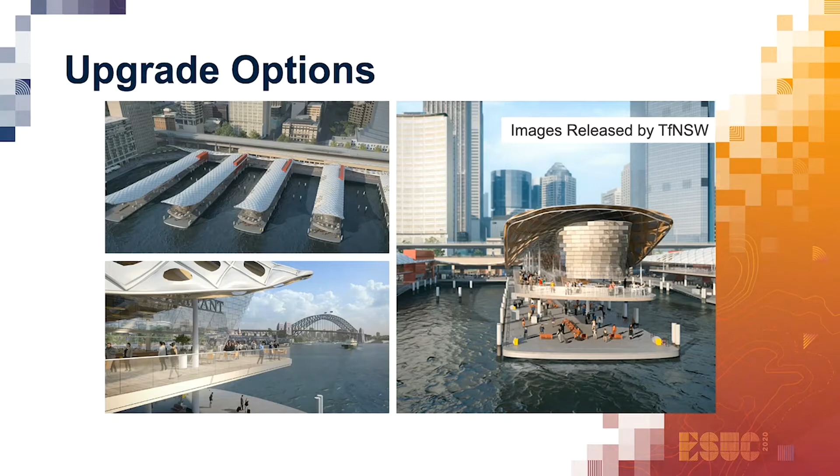So the upgrade options: New South Wales Government is considering a number of options ranging from upgrade of the ferry wharves to complete revitalisation of the precinct. This is driven by ageing infrastructure - the ferry wharves were built around 70 years ago, and the ferry wharves and promenade do not have the capacity to meet future expected growth.

So our project scope, as I mentioned, the Circular Quay renewal investigation - the project team was engaged by Transport to carry out the investigations, capture what is currently in place, and inform all stakeholders of the current assets and the conditions of those assets.

The project team comprised Coffey, one of our Tetra Tech partners—Norman Disney and Young are part of the overall Tetra Tech group globally, and Coffey are our sister company within that group. They provide technical, geophysical, asset condition, hazardous materials and contamination investigations. There were also project surveyors engaged to carry out the 3D laser scan, services detection, Revit modeling from the scan data, and asset site survey. Then NDY ourselves, a BIM and data services team, functioned as the core behind the BIM management, data management, the BIM and GIS integration, and the final product—the overall asset information model comprising all of that data.

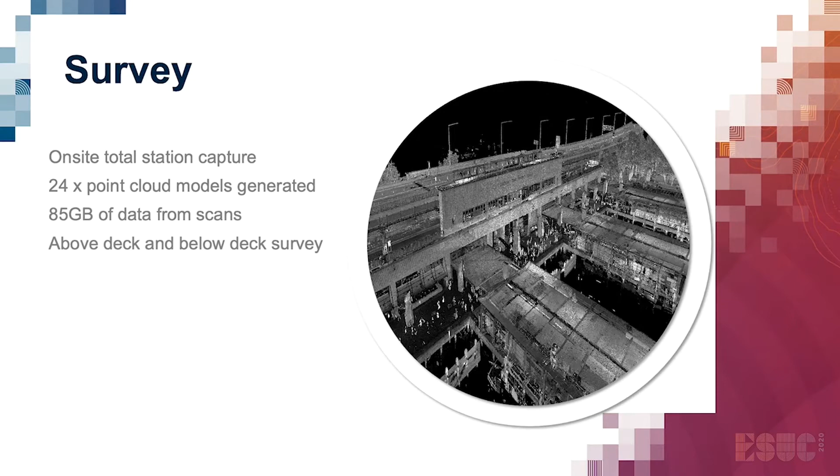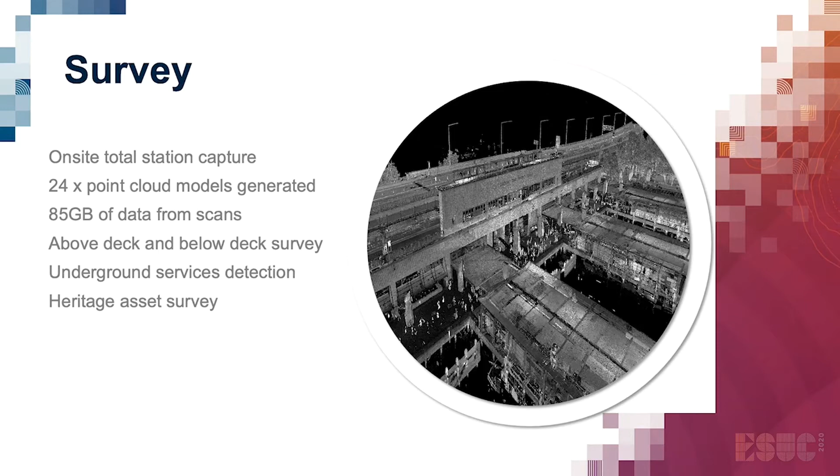From a survey perspective, we've got the on-site total station capture, 24 point cloud models generated, 85 gigabytes of data from those scans, scanning above and below deck on the wharves and promenades, underground services detection, and heritage asset data survey. There's a number of heritage listed elements around the quay which we needed to record as well, providing an overall detailed Revit model and 3D cadastral model for asset ownership management.

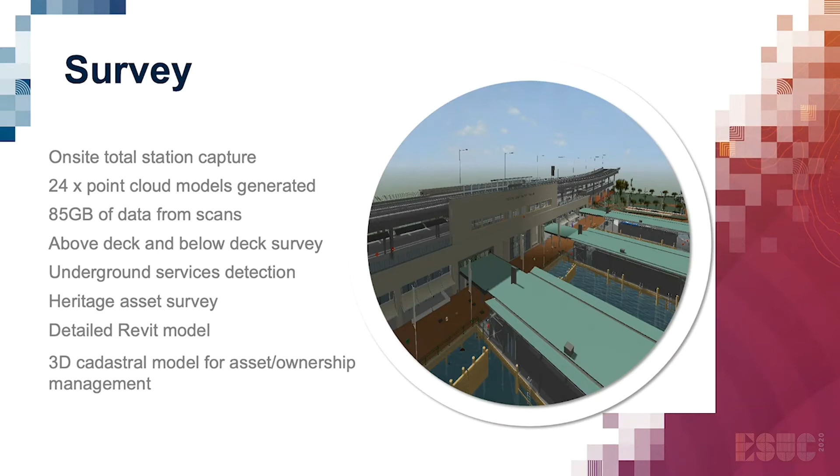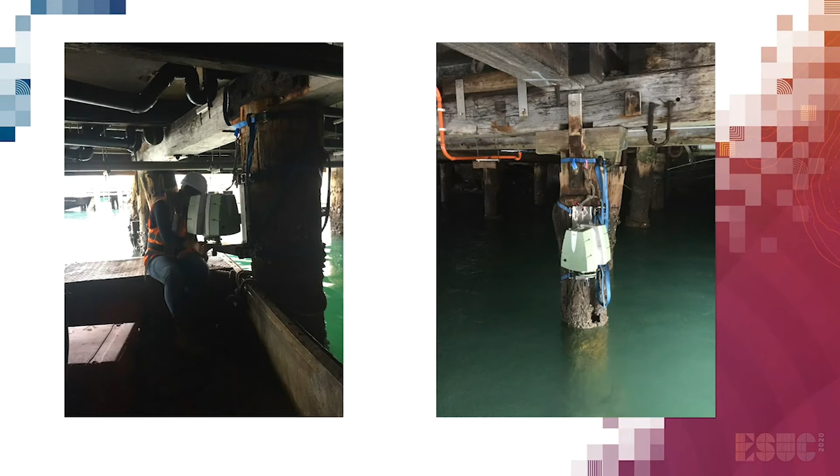Attaching the scanning equipment to piles underneath the wharves and promenades—again restricted with access, not only with it being a busy waterway, but also restrictions on the tides as well.

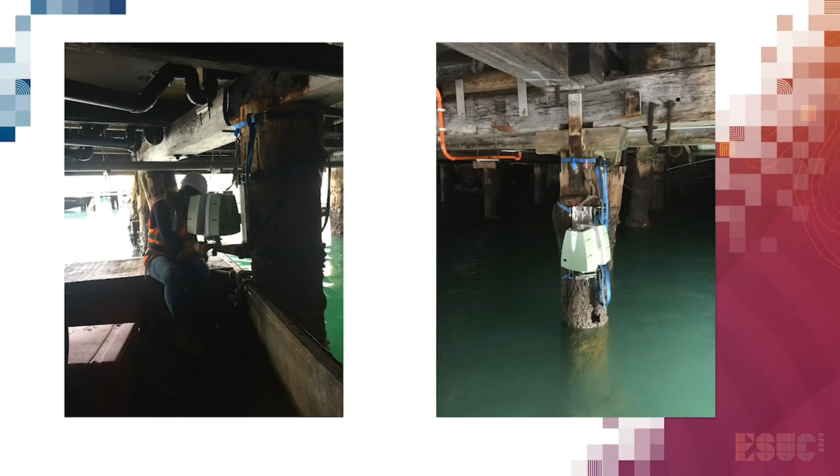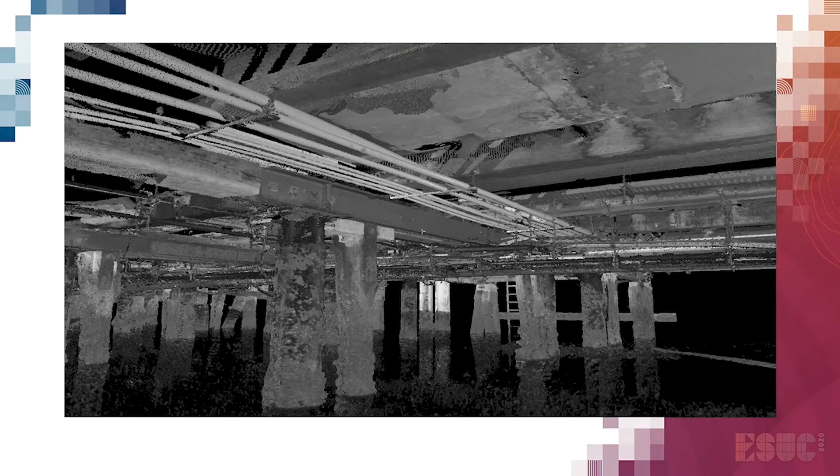One of the colour scans that was taken was from the Museum of Contemporary Art, which was also modelled.

So then getting on to the BIM, GIS and data management part. Ultimately, our deliverables were to provide 2D and 3D detailed site information, incorporate the 3D geotechnical ground model, 3D point cloud survey data and the resultant 3D Revit model, incorporating topographical survey data, existing services and utilities, and the production of that overall BIM for all of that data, and ultimately delivering that into an asset information model within ArcGIS.

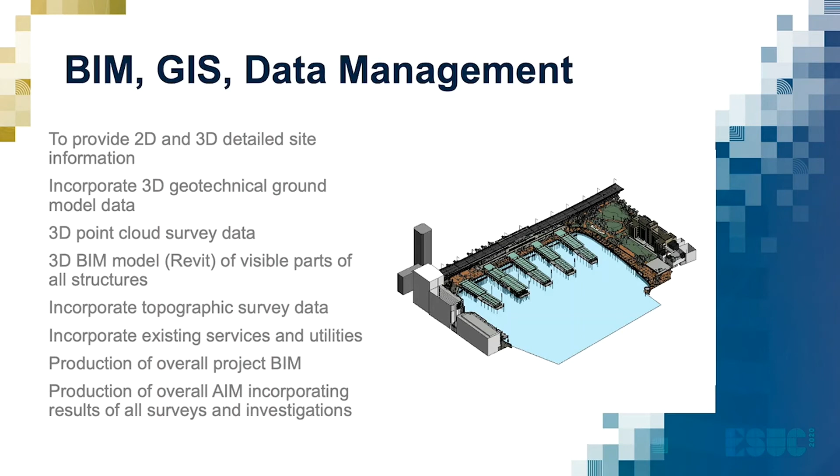At the same time, we were capturing contamination information, asset conditions, structural surveys, services, including all of the services below the wharves and promenade, and hazardous material reporting. All BIM models were delivered in their native format and in IFC, and all data structured in accordance with BS 1192.

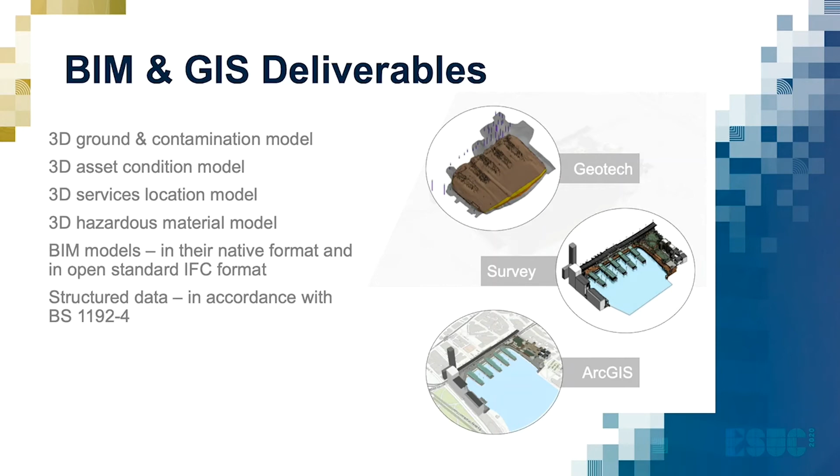So the project delivery platforms, our primary delivery platform is Autodesk Revit and Navisworks. We also utilise Revizto for project team collaboration and site survey, and Esri ArcGIS for the asset information model.

It's a high-level process diagram that was generally the way we produced and managed the data captured from the BIM authoring software, which is in Revit and IFC format, managed in Navisworks and Revizto to deliver on-site model access. Geotechnical engineering software, Rockworks and CAD outputs, again feeding into our Revit model and the creation of those Revit models.

Through ArcGIS interoperability extension, ArcGIS Pro, and then ultimately building our asset information model within ArcGIS, compilation of the GIS layers, and ultimately delivering that web scene.

For the stage 1 project, delivery was via ArcGIS Online. We wanted a very simple interface, and it was also used to demonstrate what we could do. Whilst the Esri ArcGIS Online application wasn't part of the delivery, we really wanted to demonstrate what we could do and how we could offer up that 3D model, overall asset information model, to all stakeholders on the project.

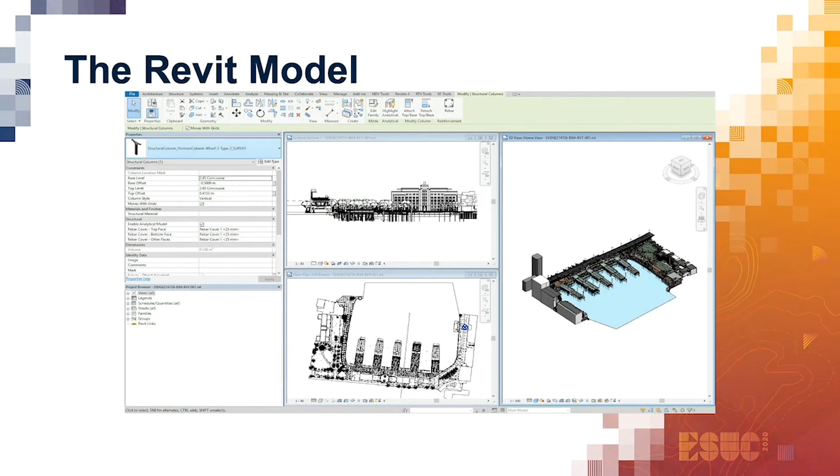So here's a few shots of the details on producing those models, ultimately ending up with an overall Revit model with all of the architectural data and structural data captured from the laser scan.

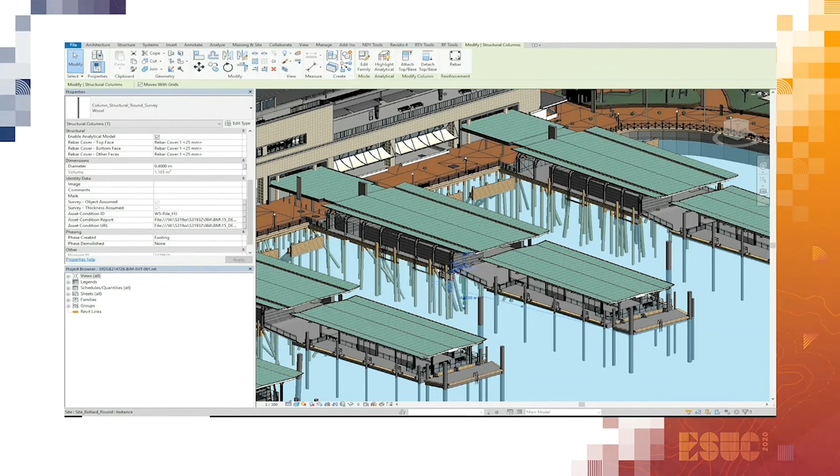So more views here of the model of the wharves, also showing the asset condition reports and the links that we're binding in to the model, so that we can then push that forward into ArcGIS and maintain those links so they are accessible via the asset information model.

There's another view which shows all the links and information maintained in the BIM, which enabled us to also manage that data externally from BIM and push it into BIM once we've finalized the structure of how the data, the supporting data and the linked data was being stored.

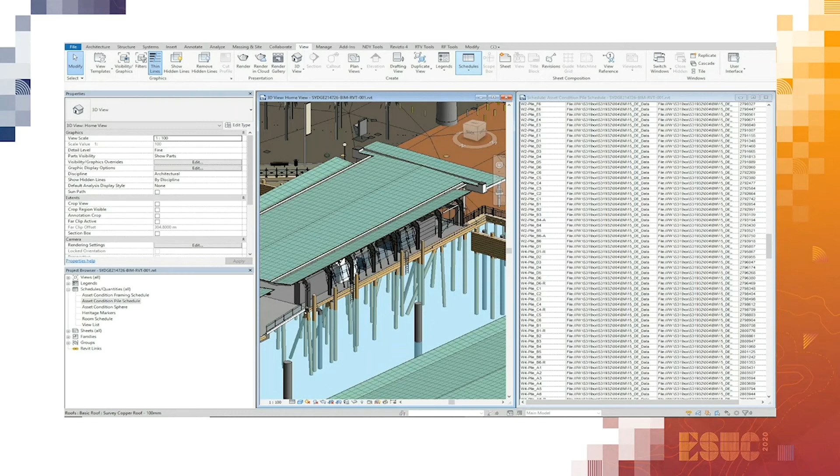And from ArcGIS, we then maintained all of that link information. There's a few views here showing the model and how it was structured. Again, managing the 3D layers, connected databases, and...

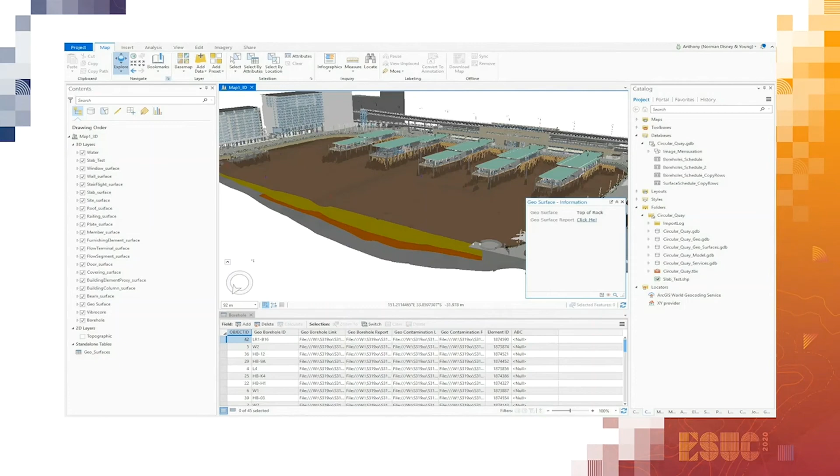testing of those links to the file server for linkages through to reports and other information that was captured during the site investigations.

There's a view on the interpreted surfaces, top of rock, below water surfaces, and also you can see there that we're building up the links to the borehole information on that particular view.

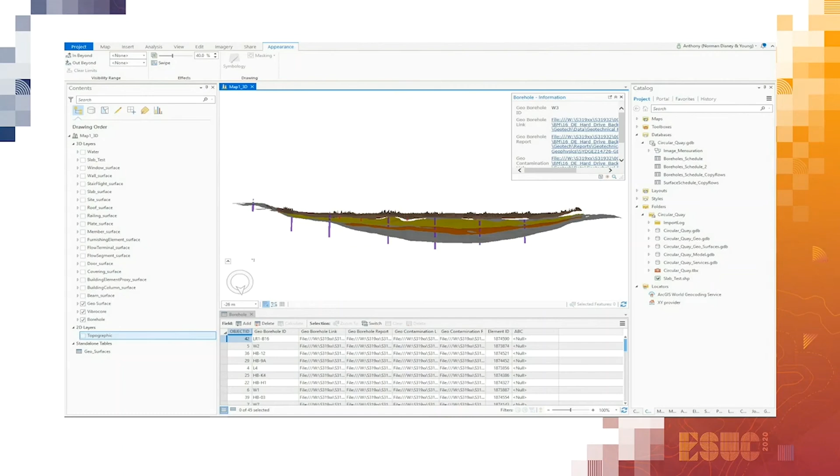Again, a closer view of the wharf, one of the wharves themselves, and there you can see an example of the rather long file paths to the data that we were linking into the model.

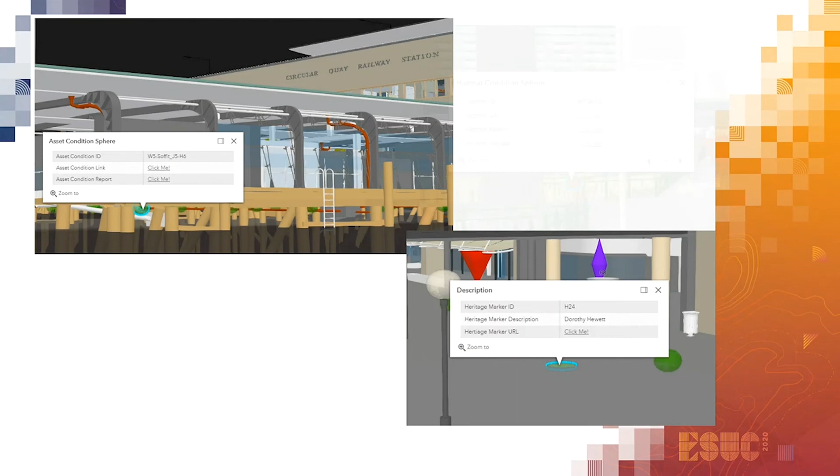So as far as the asset data is concerned, we ultimately simplified the links, and within the asset information model, within our ArcGIS, we have access to all the asset condition information, heritage information, hazardous materials, and other areas of interest around the model.

And the asset condition data, we then took it a stage further, particularly for the structural reporting, using the power of Esri to be able to color code elements within the model based on their structural integrity, in this case, looking at the piles supporting the wharves and the promenade.

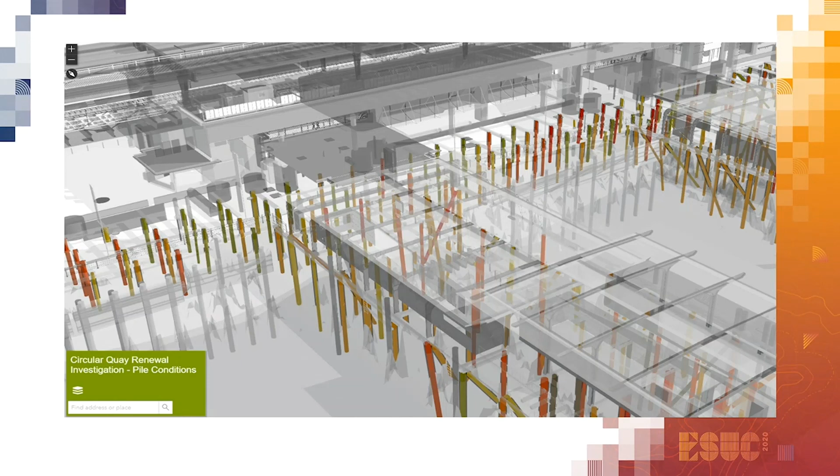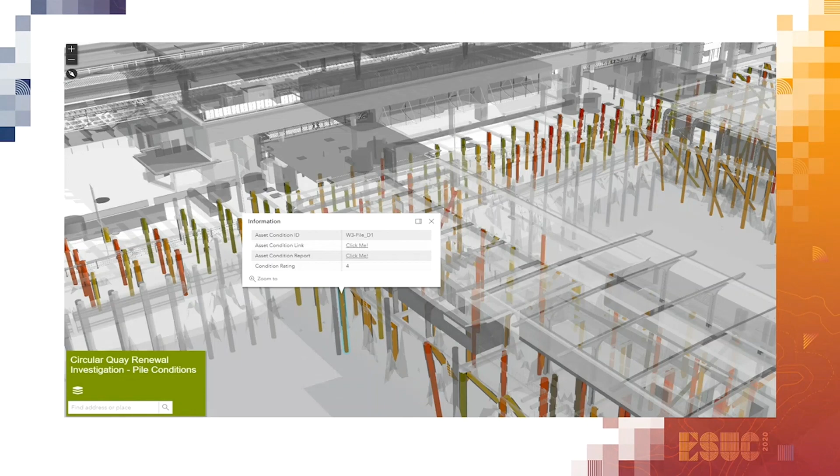And again, each element, every single element that you can see there, individual piles, beams, and the like, their structural report was captured. Photographs of each element were captured in a report, and you can see the link to that report and a link to a location of photographs and other information for each structural element.